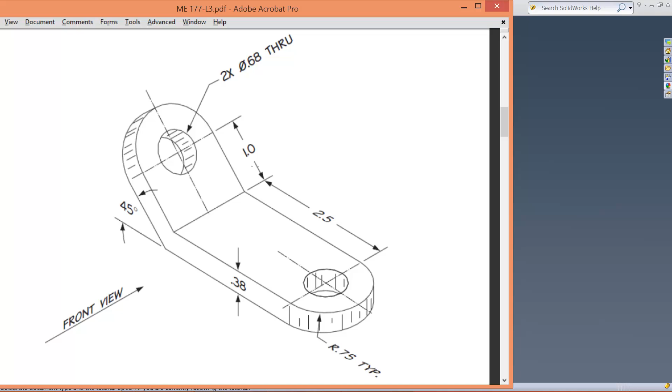This is a simple part. There's different ways of building this part, but we will use a thin extrusion option for this one. So coming back, this is an inch system, so we will make sure the part is in inch unit. So IPS, inch pound second option is on, so we are in inch system.

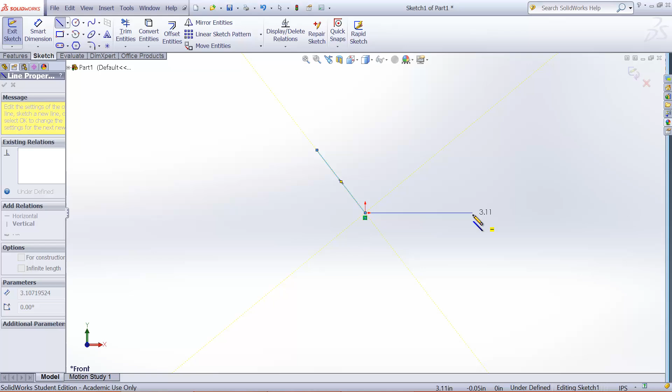And I'll use this front plane as the first sketching plane and extrude it, and I will draw a line like this. It shows the shape of the profile of this part. I need to add a dimension, and that length will be 2.5.

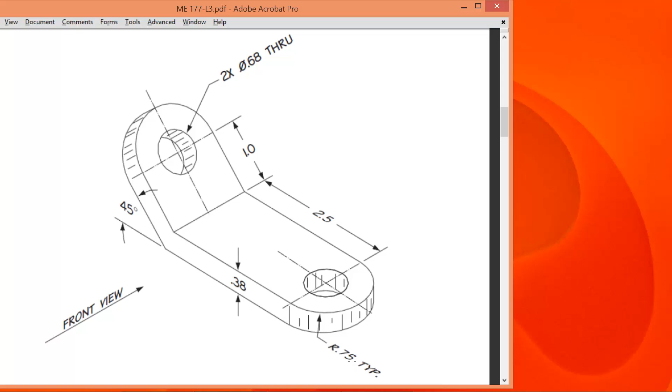I don't want to draw just to the hole, but the full length of this bracket. So that will be 2.5 plus the radius, which is 0.75. So that will be 2.5 plus 0.75.

And the angled bracket length is 1 plus the radius of this one, which is again 0.75. The typical means that the radius here is shared by the other side. So that will be 1 plus 0.75. And the angle is 45 degrees.

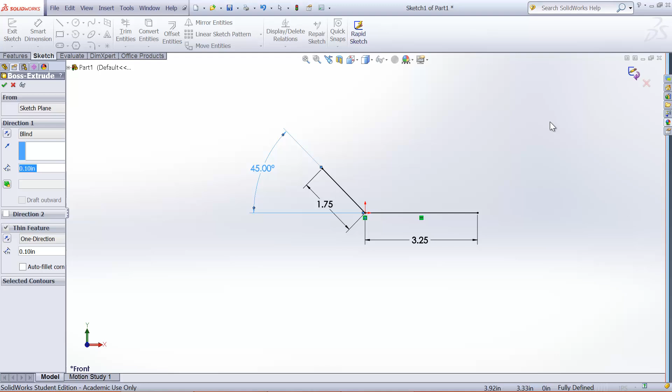So select this line and select that line. And depending on where the cursor is, it gives you a different angle. So what we want is this angle. That is 45 degrees. The sketch is fully constrained, and I need to extrude it. And because this profile is an open profile, it automatically turns the thin feature option on.

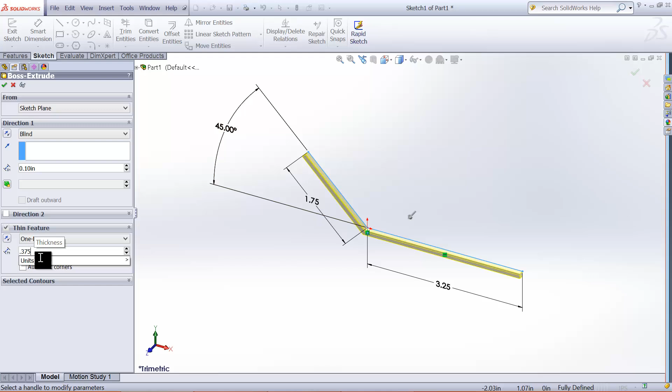And the thickness of that plate is 0.38. Actually, it will be 0.375, and is rounded up. So I'm going to use 0.375 because 0.38 would be kind of an odd dimension. And the width of this will be actually the diameter of these end cylinders. So the diameter of the end cylinder will be 2 times 0.75.

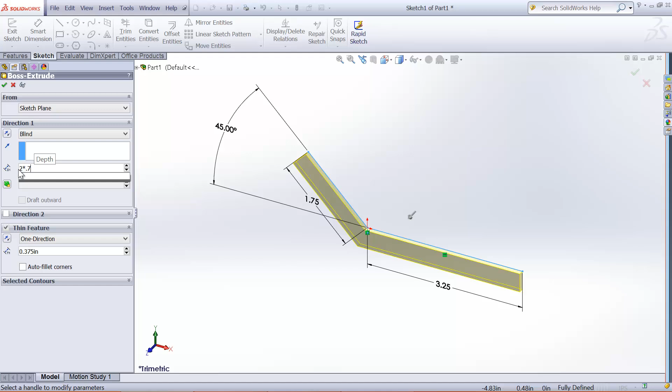And we want it to be mid-plane, so that I have a plane that is in the middle. Same principle: whenever you want to create a part that is a mirror image from a plane, you want to use the mid-plane option. Now we have to create this end shape, kind of a tombstone shape. And the easiest way is using the fillet option. Not a constant radius, but full round fillet.

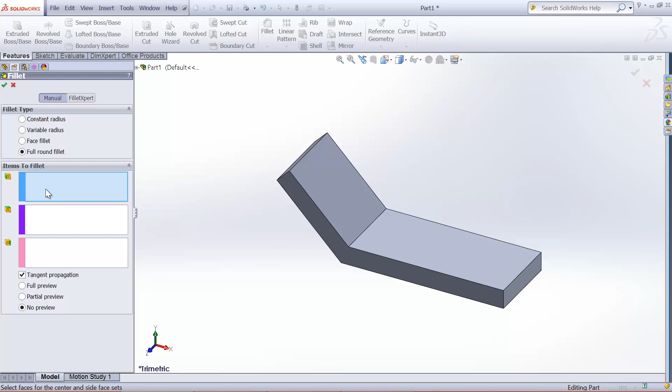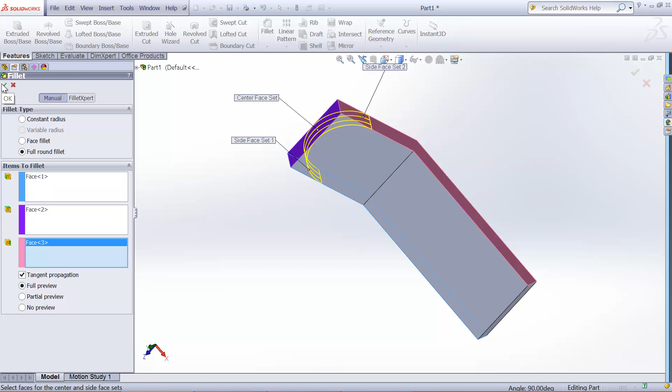If you use that and look at the icons, you have to select one side, and the second one is the end surface. That is this one, and then you need to select the other side. If you see the full preview, that shows the fillet. And we do the same thing for the other end. Full round fillet, select one side.

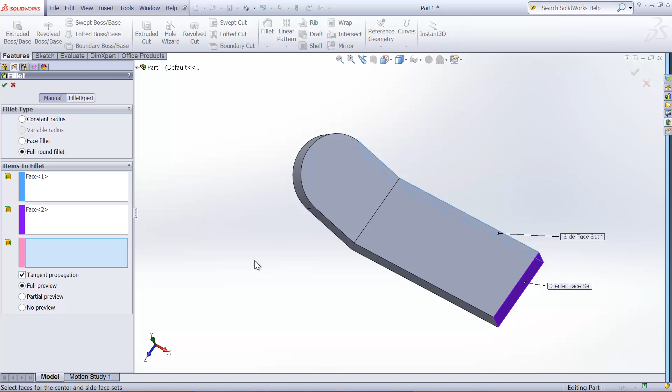The order doesn't matter. You can select any side first, but you have to choose the proper end surface. That end surface will be completely removed, replaced by this fillet surface. Alright. So that'll create basically this shape. And then we need to add the 2 holes, both ends, and the diameter is 0.68.

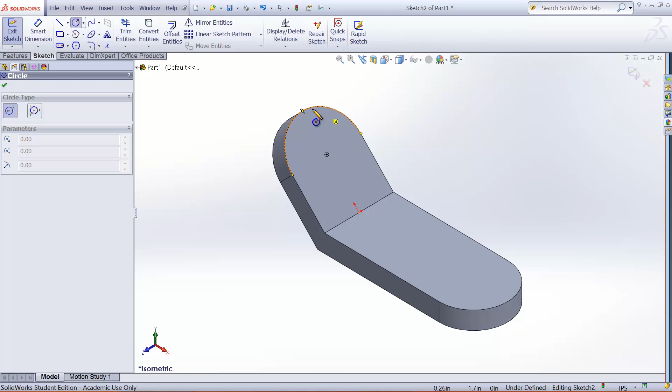So we'll create a hole. We'll just use the extrude cut, because this lesson is all about extrusions and extrusion cuts. And if you move your cursor to the arc here, I'm not pressing any button, you just move your cursor over there, it pops up this inference point, which is the center of this hole. So you can snap the center of the hole right there because they're concentric.

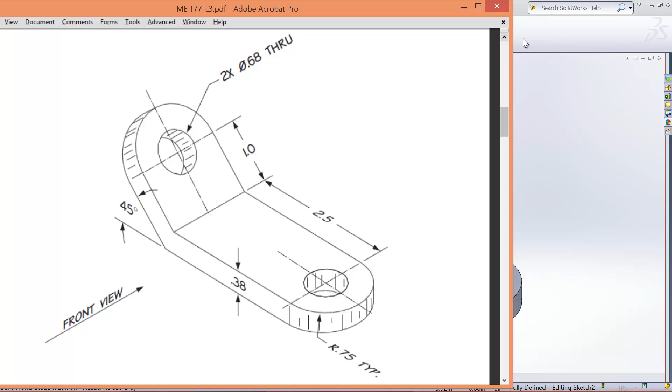And we have to add a diameter. Again, diameter is 0.68. Well, probably this is 0.675 rounded up. Let's add 0.675, but you can use 0.68 if you want to. Alright, so that, and I want them to go through all. Do the same thing on the other side. Select the surface for your sketching plane.

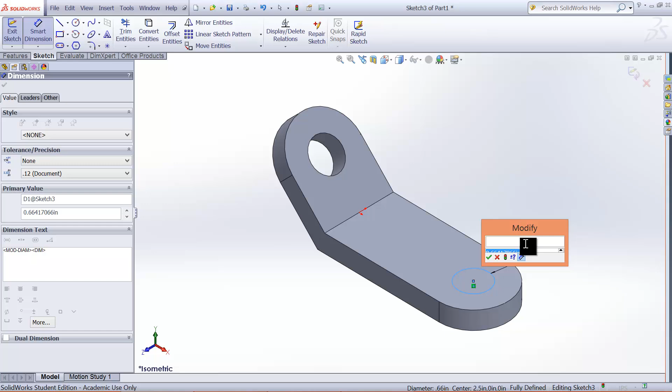Again, move your cursor over the edge, snap to the center point, and add a diameter. 0.675, and exit from the sketch and select the through all option, and that will finish this part.